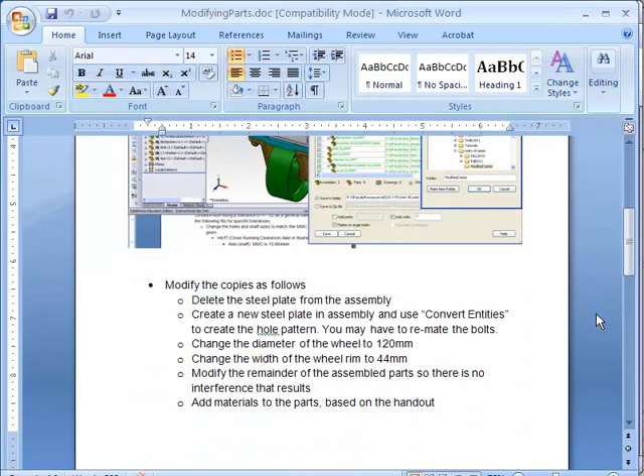The first thing it wants you to do is delete the steel plate from the assembly, then create a new steel plate using convert entities to create a hole pattern. Then it says you may have to remate the bolts. You'll also have to do some other things, including changing the diameter of the wheel and modifying the width of the rim, making sure the result of that doesn't create any other interferences, so you might have to modify some other parts.

If your parts are made correctly, this is going to be a very easy and not particularly time-consuming assignment. But the one thing you may not be familiar with is using convert entities. I'm going to go over that right now.

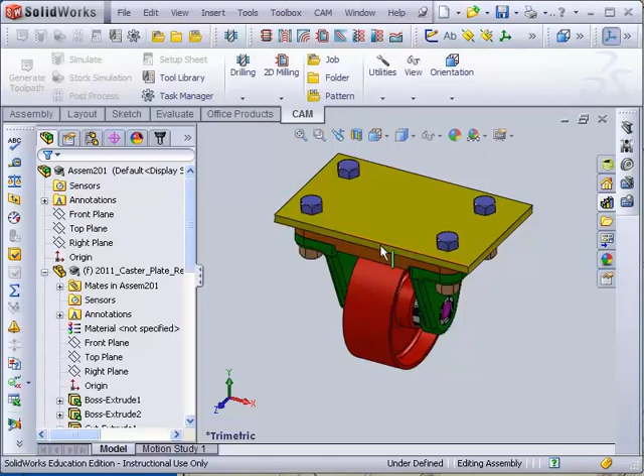First thing I'm going to do is take that steel plate and delete it, which is going to cause a problem with some mates. It's also going to cause a problem with the local pattern because I used a linear pattern to place those bolts. So when I delete that plate, the linear pattern is going to lose the edges of the plate, which I used to indicate the direction of the linear pattern.

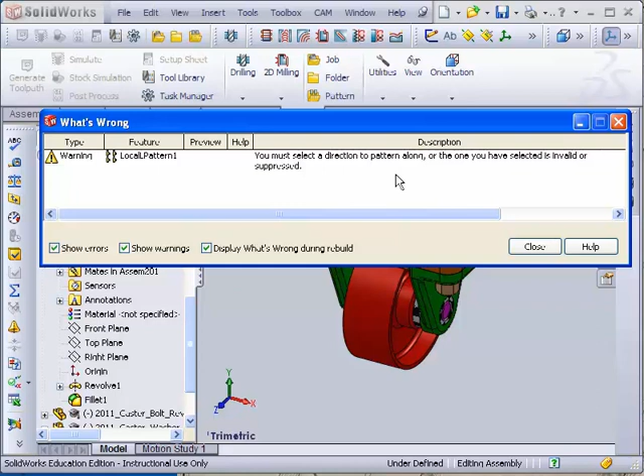Now what I need to do is find the linear pattern, which is down here at the bottom. You'll notice that it's yellow. I'm going to edit that linear pattern, and where the direction window is now blank, I'll select one edge of the top plate for direction 1, then go down to direction 2 and select a different edge of the top plate. You'll notice it places those bolts in there correctly by understanding what the directions are going to be.

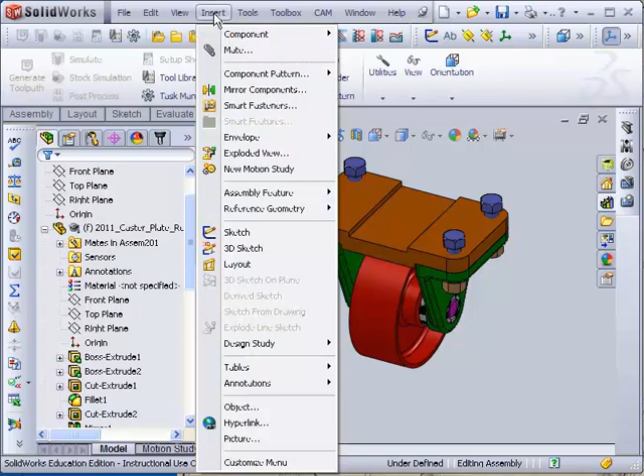Now to create a new top plate, I'm going to insert a component, or a new part, into this assembly, building this part in the context of the assembly itself. I go to Insert, Component, New Part. You're going to get this error message in this lab - that's simply because I installed two versions of SOLIDWORKS, 2010 and 2011, and 2011 is a little confused as to the default templates. All you have to do is pick OK and OK again, and you'll be all set.

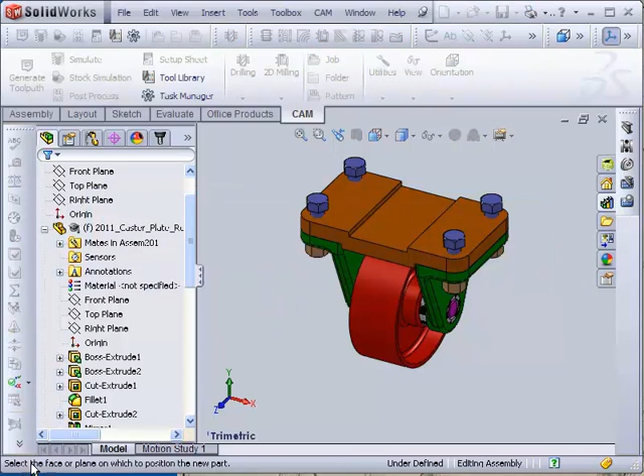Now you have this green check. If you look at the bottom status bar, it tells you to select the face or plane on which to position the new part. I want it positioned here, so I'm going to select that point. Now all the parts that are part of the assembly become clear, just so you know they're not part of this part itself.

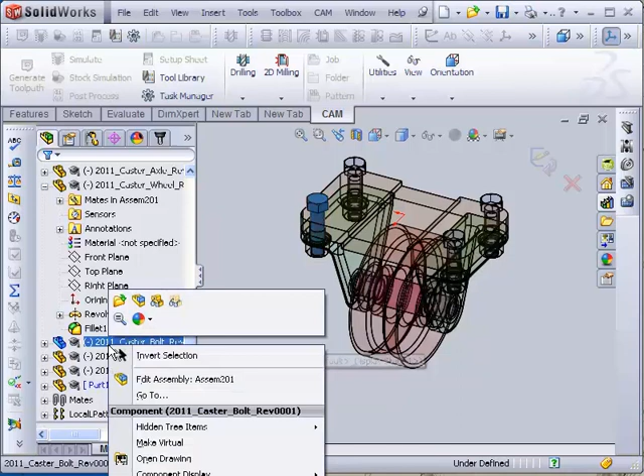I'm also now going to hide each of the bolts so that when I do this, it's a little bit easier to see what I'm doing. Rather than right-click on the bolt, I'm going to go over to the Feature Manager, right-click, go to the little eyeglasses icon that says Hide Components, go down to the next one, do the same thing, and then go to the local pattern and do the same thing.

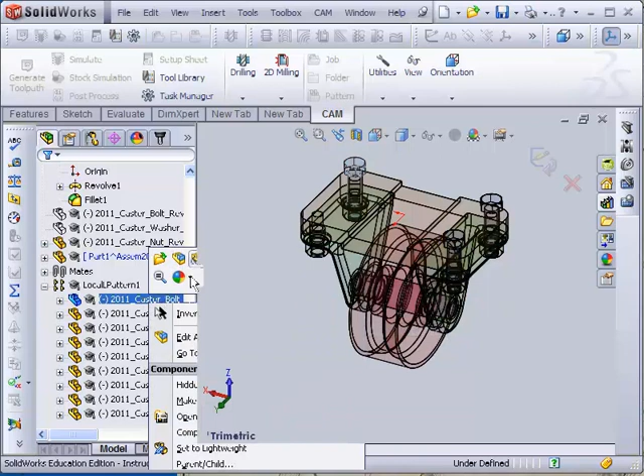I can't hide the whole pattern as it turns out, I thought I could. So what we'll have to do is go in and take each one of these and hide them, and then we'll come back afterward and I'll make them visible again.

That's all I really need to hide just to get everything out of my way. Now I'm going ahead and going to make a new part. I'll look down at it from the top view, come out a little bit, go to the sketch function. Under sketch, I'm going to grab the rectangle and just put a rectangular plate on top of it.

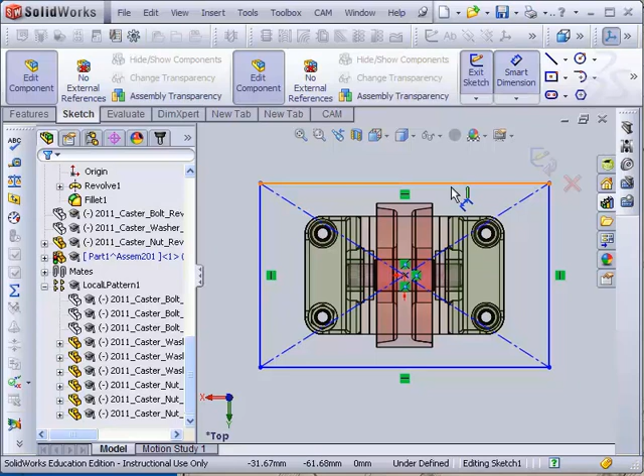It doesn't really matter how big it is because it's simply indicating a piece of another plate. So I don't need to dimension it, but I'm going to anyway just to make sure that I have everything fully defined. We'll go with 200 millimeters, and over here we'll go with 128 millimeters.

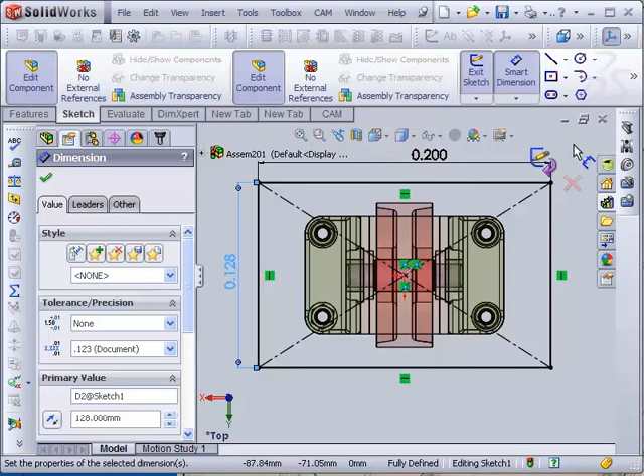I'm typing the millimeter symbol because the units are not set properly for this new assembly. So when I get out of here, I'm going to leave that for a second, go up to my options and change the unit. Okay, now I'm back in the editing the part mode.

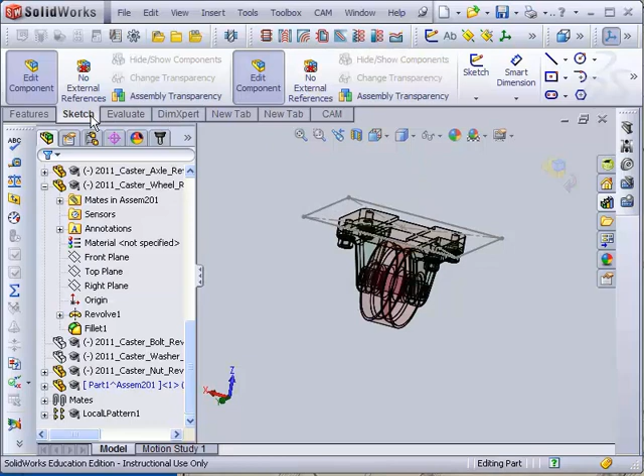I've got a sketch for that rectangle, so what I want to do now is go ahead and extrude it. In order to extrude it, I'm going to go back up to the tabs, go over to Features, Extruded Boss Base.

There's my sketch I want to extrude. Have it come up 6 millimeters. Looks like that. Now here's the part where I'm going to use convert entities because I want those holes in this base, in this plate, to match the holes in the top plate here.

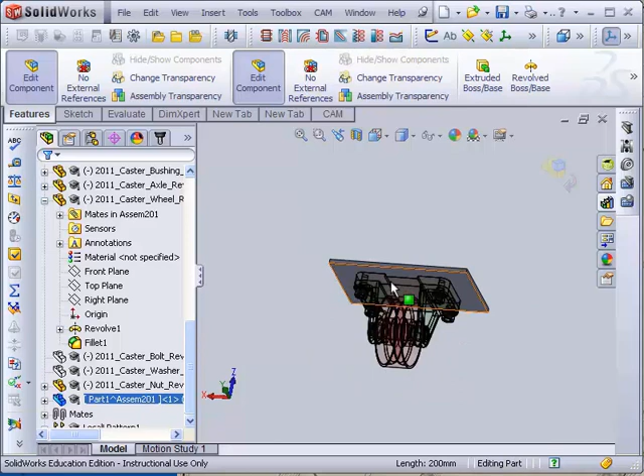So I'm going to go in, go up to the sketch mode again. I'm going to have to move this aside, but you're going to see convert entities up there. I'm going to select convert entities. When I do, I'm going to get a feature manager window that allows me to select the individual entities.

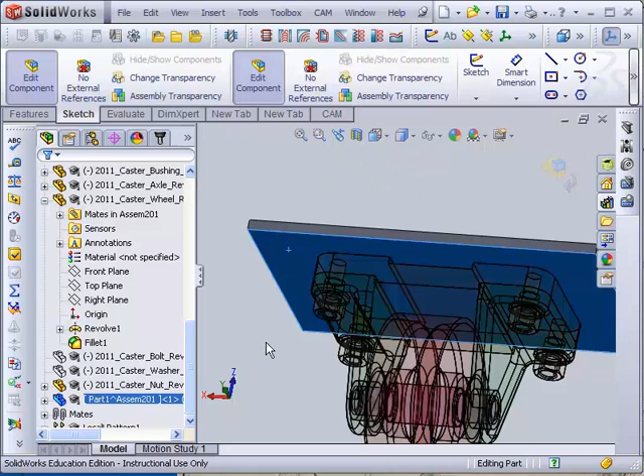Once I've selected the surface I want to put those entities on -- I'm sorry, there's one thing I neglected to do, which is to select the button that says sketch to go back into the sketch mode. Now it asks me to select a planar face. Now that I've selected that face, I can go over to convert entities and select the entities I want to convert.

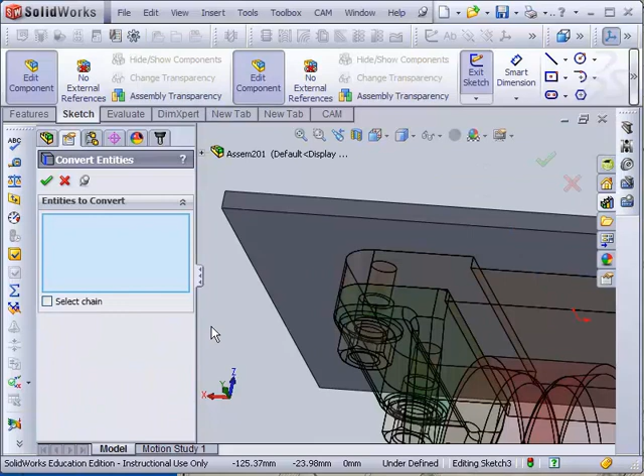Now the entities I want to convert include each of the holes. You notice when I go over here to pick one, it's looking for a plane, and the reason is because there's this large plane surface behind. So this is where I'm going to type the letter E, which now filters my selection set -- you see a little bit of a funnel there -- so that it will only select edges.

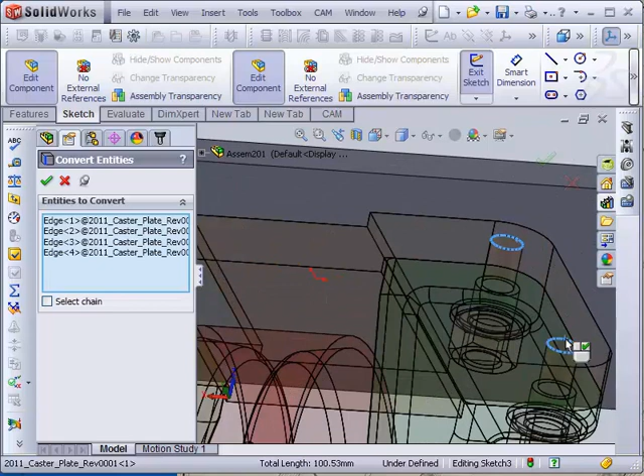Now I can pick that edge of that hole, the edge of that hole, the edge of that hole, and the edge of this one. Once I've got all of those selected, go over and grab the green checkbox, and now each of those things has been converted, and the relationship that's added is what's known as an on-edge relationship.

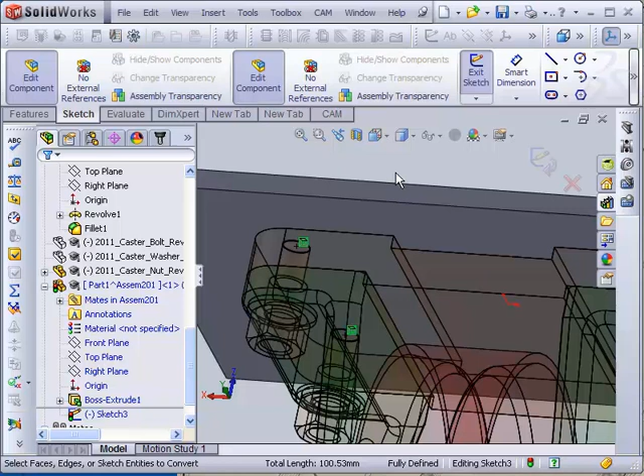I'm going to close out convert entities, press the E again so that I get rid of my filter, and then I'm going to go to the features and now do an extruded cut, and have each of those holes go up to surface. Select that surface right there, check that button right here, and now I've got a hole pattern.

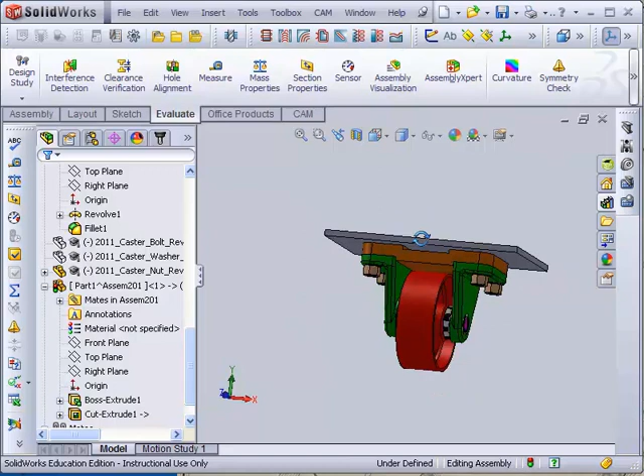That hole pattern is based on the hole pattern of the top plate. That means if I change the hole pattern in the top plate, it will subsequently change the hole pattern in that steel plate as well.

I'm going to save my assembly, all the parts. It contains an unsaved virtual component. We can save it internally, which is inside the assembly, or externally. I'll go ahead and save it externally. Name right now is part 1, I'll change that to steel plate.

I'll change that to steel plate, Rev 0001. Okay, it's going to go in the same location as the one I have.

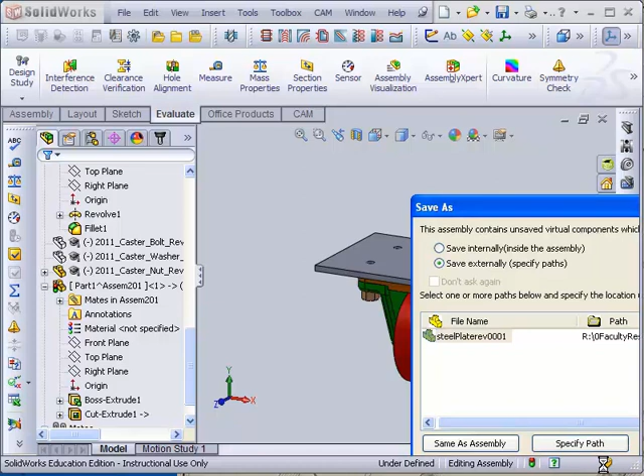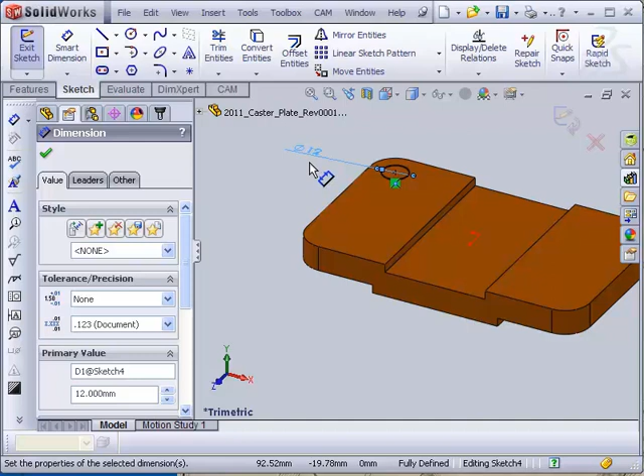Now just a quick demonstration: if I were to go and open up the top plate now, and in that top plate go and make a change in those holes, either in their position or in their size -- so what I'll do is just change their size. Right now the size of that hole is 8 millimeters. If I were to change that to 12 millimeters, much bigger hole, you can see it's a lot larger there.

When I go back to the assembly and update the assembly, the holes in the top steel plate have gotten larger as well. So you can see that they're controlled by the holes in the top plate.